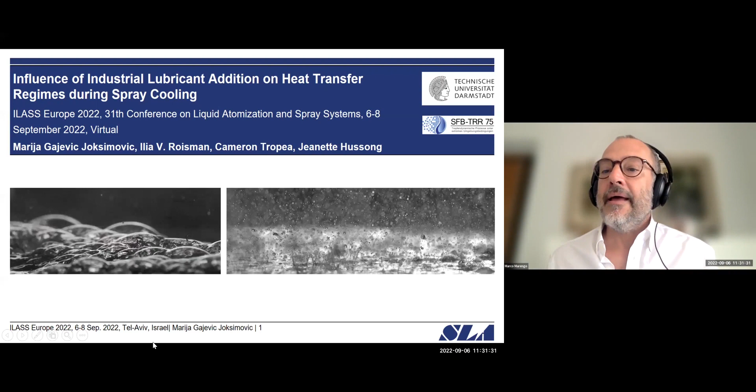And we don't see you. Yes, so, you're there, okay, fine. Now you can see? Yeah. Do you see my screen? Do you hear me well? Is everything fine? We can hear you very well and can see your presentation. So please, the floor is yours.

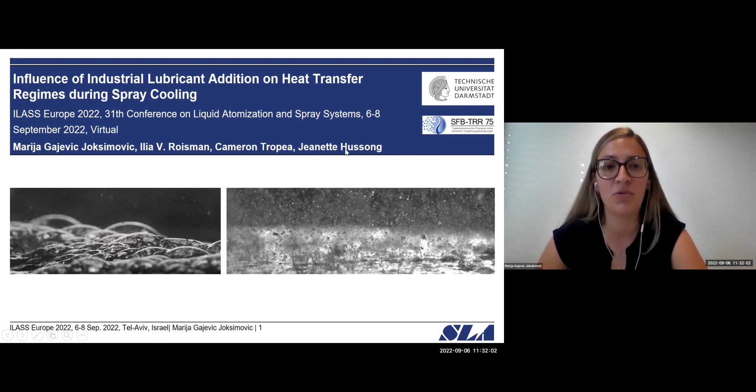First we start with motivation. What is the motivation for this type of research? Namely, in the hot forging industry, the power hammer or dies must be cooled down after each working cycle to reduce their thermomechanical fatigue and to reduce die wear.

Also, in order to achieve less friction between working parts and dies, lubrication of the contact surfaces is needed. In today's forging industry, the most widely used cooling method is, of course, spray cooling.

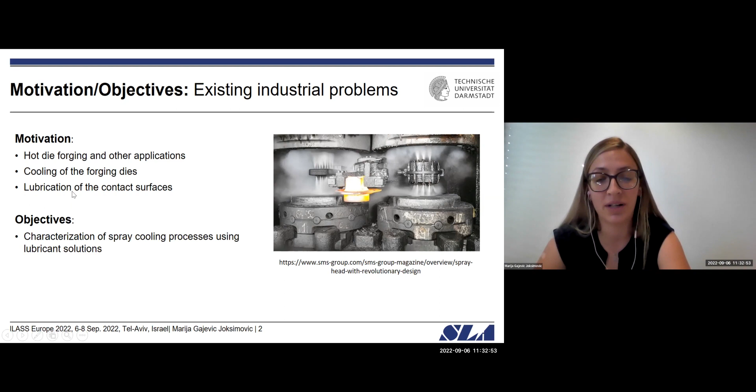This leaves us with one objective, which is characterization of spray cooling processes using complex liquids during spray cooling. Our liquids are lubricant solutions.

Lubricant Lubrodal F327, produced by the company Fuchs Lubricant, is used as a base for preparation of our lubricant solutions. It can be described as a water-based, water-miscible, graphite-free die lubricant, widely used in the forging industry.

It is supplied to us as a concentrate containing a specific amount of organic salts that provide lubrication when utilized. Also, some additional inorganic and organic components, so-called surfactants and binders, are present as well.

These additional components stabilize the concentrate and promote the spreading of adherent lubricant layers on the die surfaces.

Before spraying this lubricant, further dilution with water is needed, but further stirring is not needed because the main component, organic salts, is completely dissolved in water.

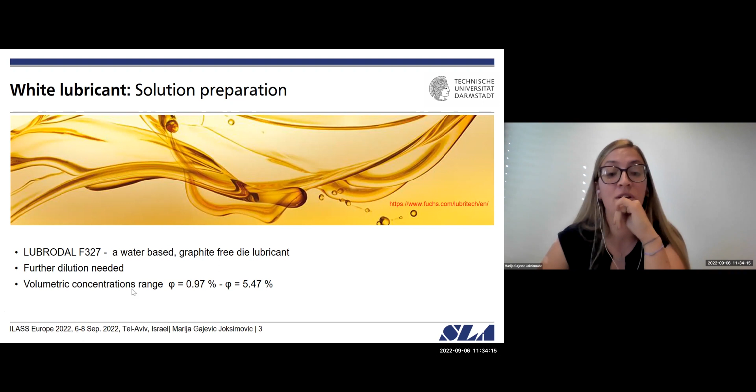In our experimental campaign, we used 8 different lubricant-to-water mixture ratios, thus achieving 8 different organic salt volumetric concentration ranges, which are presented here on the slide.

The system contains four subsystems comprising a spray generation system connected to a fluid supply, and, of course, a heating system with temperature measurement and control.

We have an observation system with a high-speed camera and backlight illumination, and a computer control unit for acquiring experimental data and controlling the experimental flow.

Spray is produced by one commercial, one-component, liquid-driven nozzle, and different impact velocities of the spray droplets can be achieved by varying the height between the hot substrate and nozzle with a linear traverse.

Also, by supplying different pressure to the nozzle, we can achieve sprays of different impact properties.

It is important to mention that after each experiment is completed, we have a solid residue present on the substrate due to the complexity of our liquids. In order to proceed with the next experiment, the substrate surface needs to be cleaned.

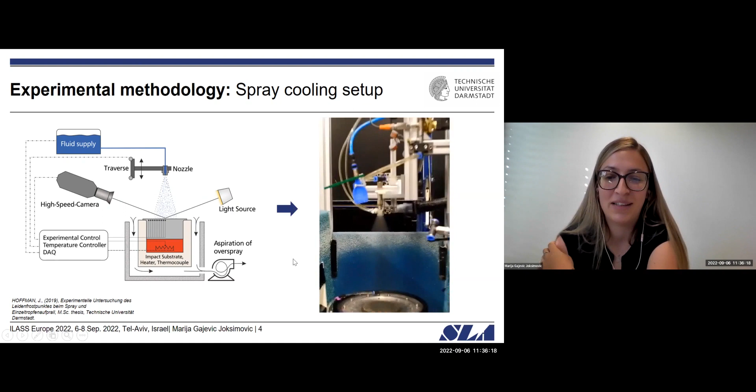On the right, you can see our experimental setup in use. This is just for show — the surface was not heated and the camera is not there, but just for you to see how it looks.

We are, of course, interested in heat flux and surface temperature of our substrate. To evaluate both, we have to solve an inverse heat conduction problem using temperature readings from thermocouples embedded in the substrate as input data.

Our thermocouples are type K, class 1, with an exposed measuring tip, thus enabling quick response time.

These thermocouples are embedded into a stainless steel substrate and arranged in two rows. The first row is 0.5 millimeters below the substrate, enabling quick response time, and the second row is 20 millimeters below the substrate surface.

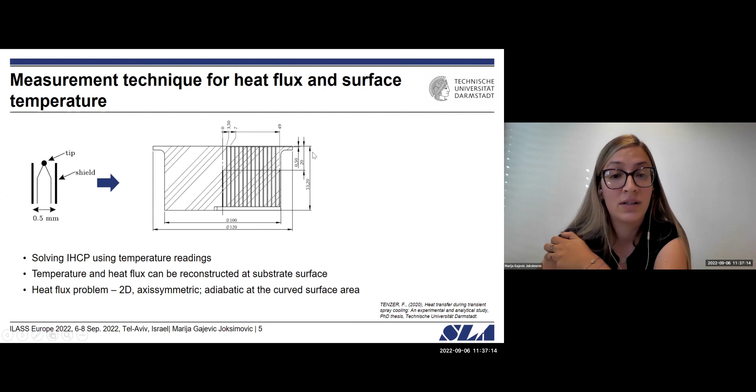Next, our substrate is placed into a watertight housing with a copper heater screwed onto the bottom of the substrate. Additionally, the substrate is insulated completely from the sides and the bottom.

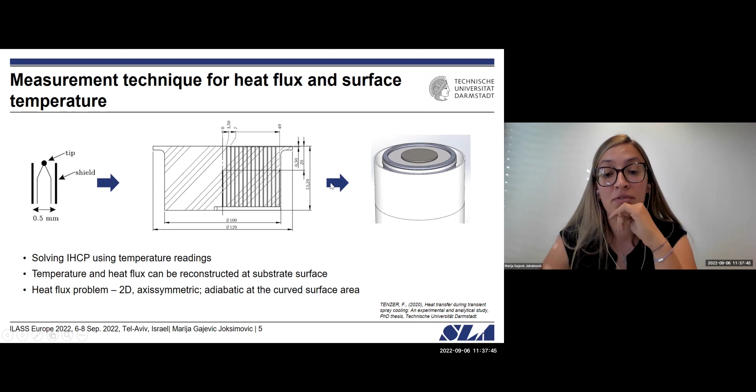This allows us to treat our heat flux problem as two-dimensional, axisymmetric, with an adiabatic condition at the curved surface area. So heat transfer happens only through the top surface.

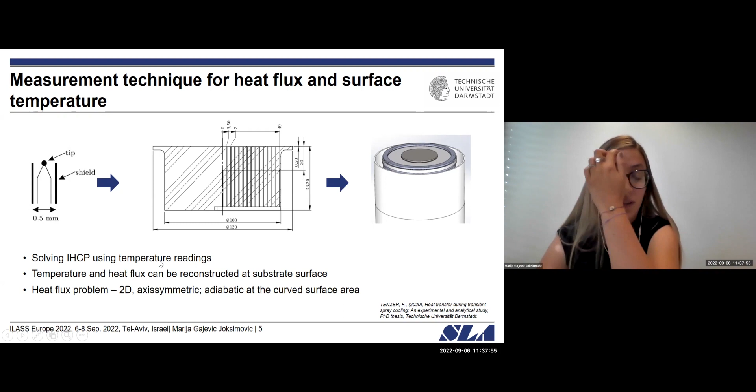The inverse heat conduction problem is solved by a procedure published by Monde and co-workers.

Before I proceed with some results from the lubricant solution experiments, I want to show you how the temporal evolution of a local heat flux looks like for a known case, which is, of course, distilled water.

For this case, at the very beginning of the cooling process we have, of course, film boiling regime, where the substrate is covered by a thin vapor layer and heat flux remains low and nearly constant for about 80 seconds.

When the Leidenfrost point is reached, we can observe the first liquid patches, identifying the transitional boiling regime. With increase of heat flux, critical heat flux is reached, and after that we see an evidently completely wetted substrate and nucleate boiling.

In contrast to that, even a small amount of lubricant added to the spray liquid significantly changes the values of heat flux, especially at the early stages of spray impact.

The values of heat flux are the same for distilled water and for lubricant solutions only during the first few seconds of spray impact. After that, the Leidenfrost point can be recognized as a kink in the corresponding curves, indicating a sharp increase of heat flux, which consequently reaches a critical heat flux, identified here as way higher than that for pure water.

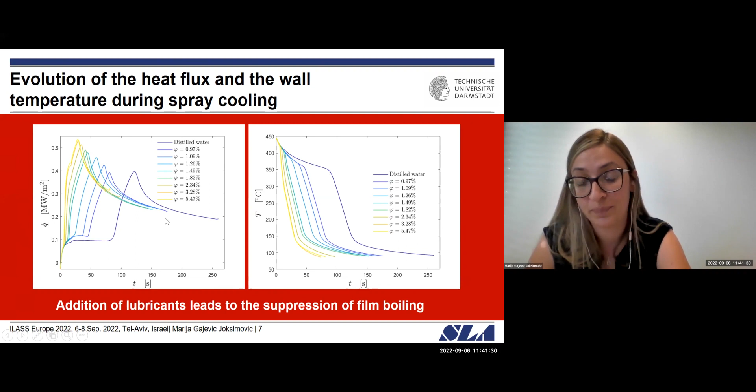Now we want to see some visualizations. We are interested to see how the phenomena of spray impact onto a hot substrate looks with addition of lubricants. Here we will observe two boiling curves: one for distilled water, and the other for one exemplary lubricant solution, with all parameters during the spraying process kept the same.

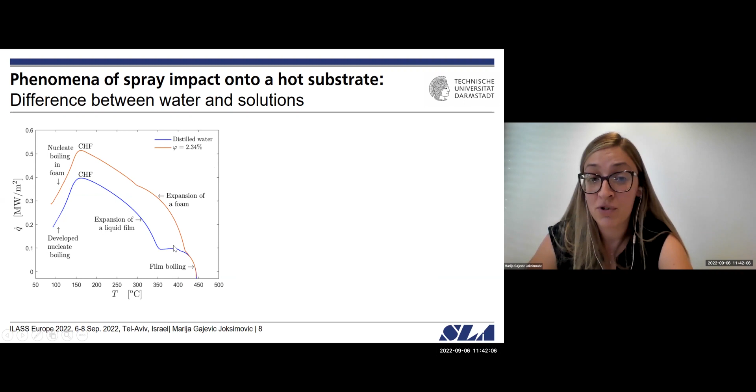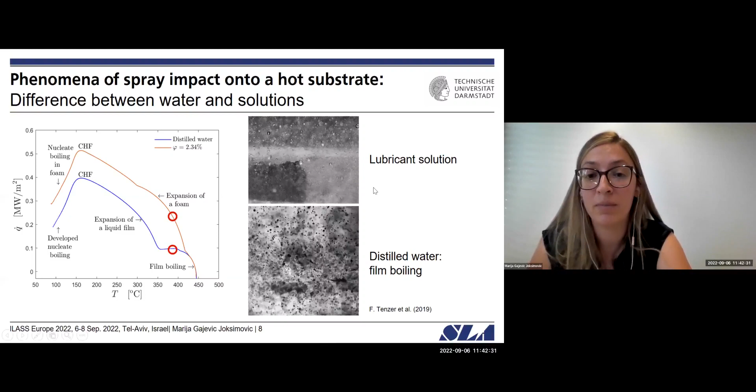At a very high temperature for pure water, we observe film boiling regime, where the substrate is covered by a vapor layer, and the phenomena of drop rebound can be observed. In contrast, for our lubricant solutions, we have separate wet spots that form at very high temperatures. These spots merge as liquid volumes and generate a very dense foam until a completely developed, relatively thick foam layer is present on the surface.

Maybe we will rewind it a little. Now, if we proceed with a decrease in surface temperature, for distilled water we observe transitional boiling with fast inception of liquid patches. For our lubricant solutions, we have expansion of a foam layer, which is here associated with transitional boiling, so the substrate is completely covered by a foam layer.

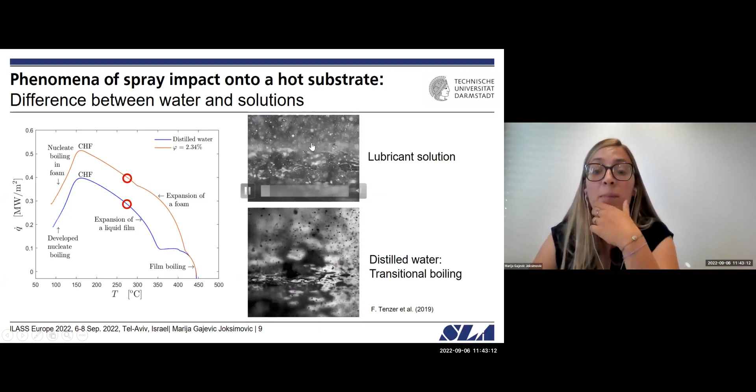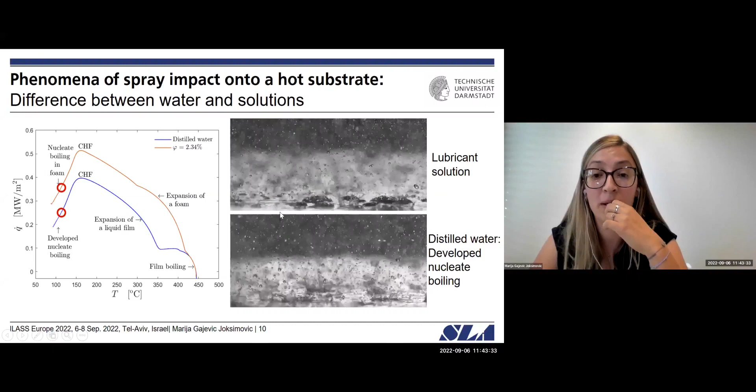If we proceed further, for distilled water we have, after reaching critical heat flux, developed nucleate boiling. For lubricant solution, we still observe foam, but breakage of the foam layer happens due to very low temperature and the incoming spray liquid. The strong difference between these two boiling curves is caused by the very intensive foaming phenomena observed for lubricant solutions.

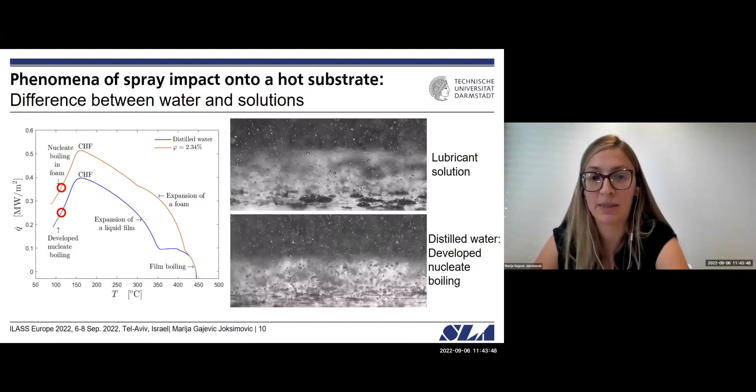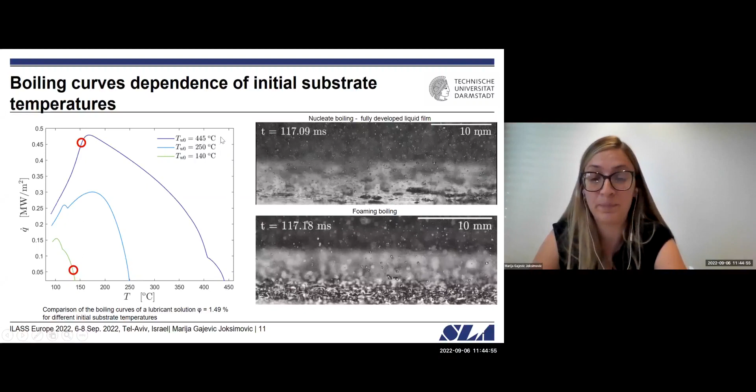We mentioned before this suppression of film boiling at high wall temperatures for our lubricant solutions, but of course we have to explain why it is happening. We know for pure water, in film boiling regime, we have drop rebound. And for our lubricant solutions, we observed this very extensive foaming phenomena.

It's thus rather tempting to say film boiling is suppressed by this foaming phenomena, but this is not necessarily correct. Namely, foaming phenomena as well as suppression of film boiling is caused by one very same reason, identified as the presence of salts and surfactants in our solutions.

During solution spray impact, we have intensive evaporation in close vicinity of the wall, and a volatile component, in our case water, evaporates first, leading to a fast local increase of salts and surfactants on our substrate, and even to salt crystallization.

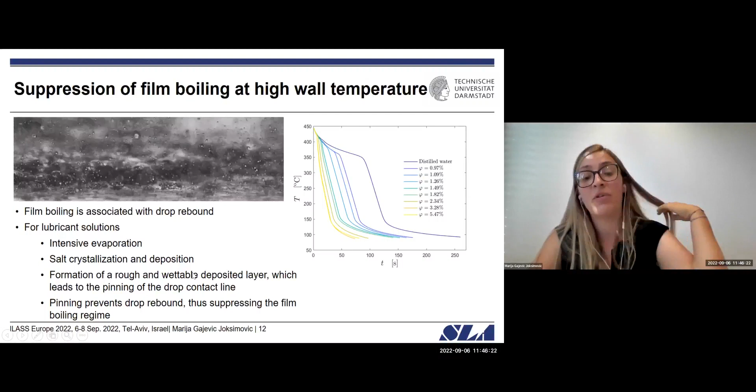This leads to formation of a rough and wettable deposited layer, which leads to the pinning of the impacting droplets. As you can see here, the impacting droplets are pinned to this layer, and then foaming starts. This pinning prevents drop rebound, thus suppressing the film boiling regime.

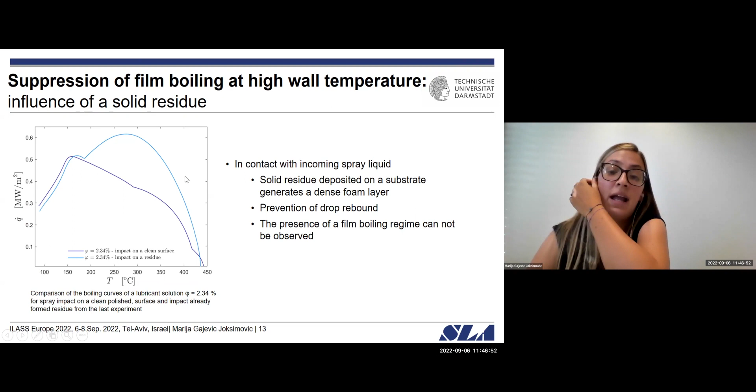As you can see, when we have this layer, no film boiling regime can be observed, and this solid residue generates a really dense foam layer, which is also indicated here by this jump in slope, with a fast increase of heat flux and better cooling rate. Around 190 degrees, we have a breakage of the foaming layer, and we apparently have an almost completely wetted substrate and nucleate boiling.

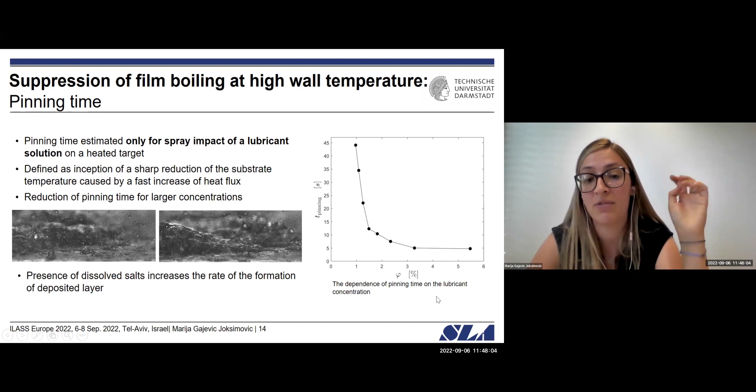So we mentioned this pinning, and we mentioned suppression of film boiling. We can estimate this pinning time from the data I showed before, which is also shown here. This pinning time is defined as the inception of a sharp reduction of the substrate temperature caused by a fast increase of heat flux. We can see here that for larger concentrations, we have a reduction of pinning time, because the presence of dissolved salts increases the rate of formation of the deposited layer.

We come to a summary. During this measuring campaign, we performed measurements and calculations of heat flux for a broad range of lubricant solutions, and we performed over 200 experiments.

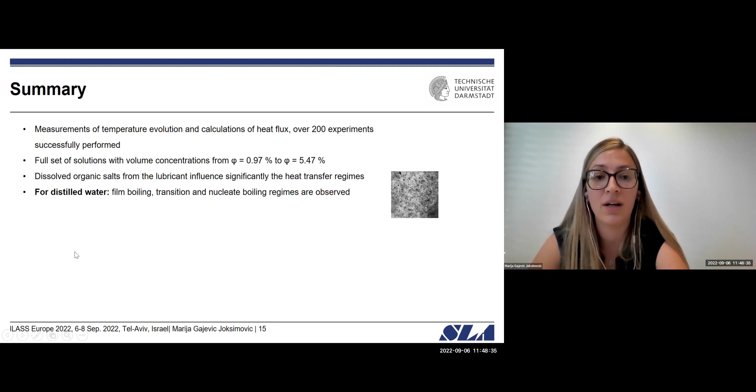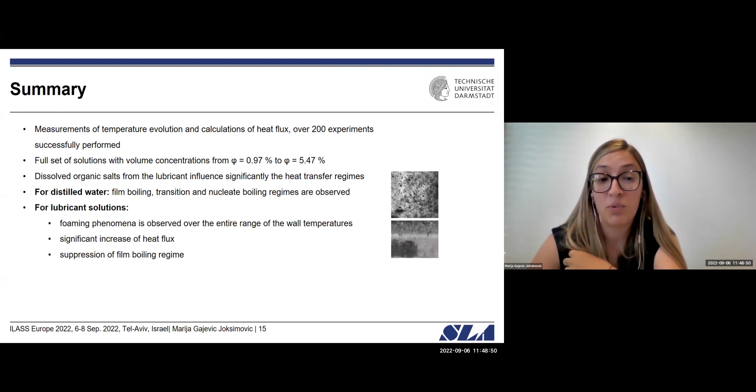We saw that dissolved organic salts significantly influence the known heat transfer regimes. For distilled water, we already know what happens, but for lubricant solutions, we observe this foaming phenomena over the entire range of wall temperatures, a significant increase of heat flux, a reduction of total cooling time, and most importantly, suppression of the film boiling regime. We explain the suppression of the film boiling regime by the pinning of the droplets to this deposited layer.

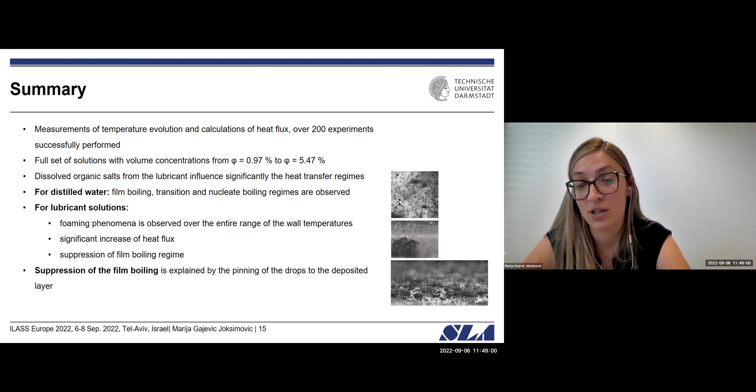Thank you for your attention, and I would be happy to answer some questions if there are any.

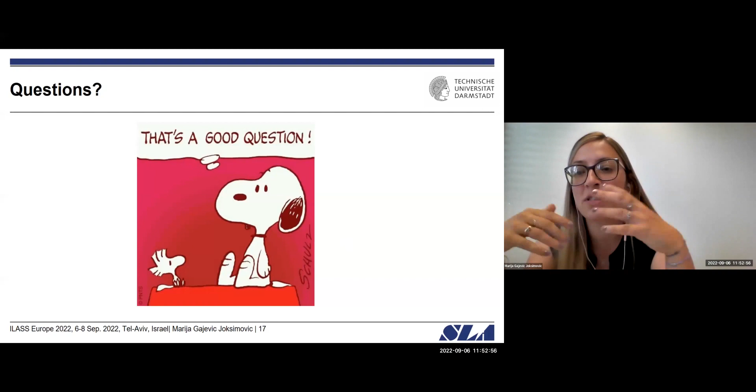So the idea is that the lubricant is part of the process in this industrial process. They like to have the lubricant, right? Because in fact my question was: the lubricant stays at the end, it's not going to evaporate, so it stays. It provides good wetting and reduces friction. It should stay and also have good wetting on the tools. So in this case you need it, but in other cases you don't want to have other contaminants at the surface.

That's a really interesting question. It's hard to differ, because when you say complex liquid, that's why we are now observing on the single drop level. I just started that measuring campaign. With the bottom view setup we can see really the initial contact and what happens, because it's hard to differentiate the influence of these salts from the influence of surfactants. It's known, and Professor Chandra has more papers on that, that the addition of surfactants leads to this foaming. So it's really hard to differ which quantity is causing which effect to be more pronounced, and for that reason I'm now doing these bottom view experiments to better understand it.

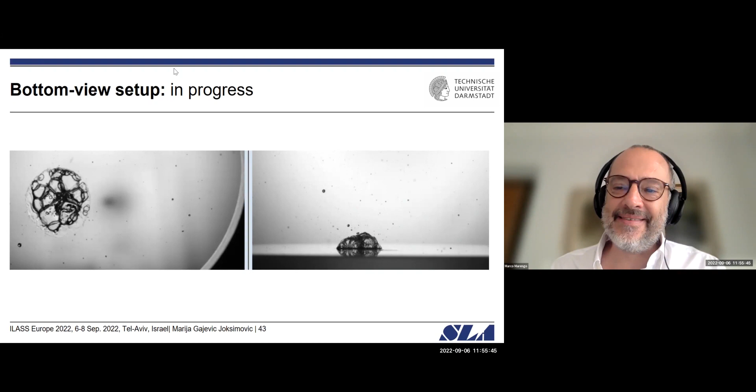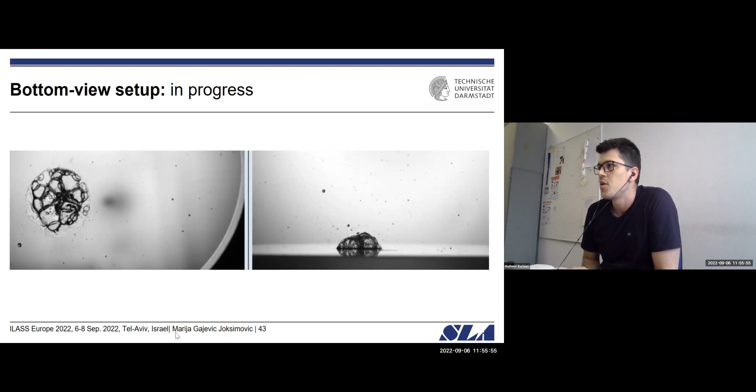But does the existence of these solid residuals on the surface increase the pinning effect when the droplets are impinging on it, suppressing the film boiling regime and inducing higher heat transfer coefficients?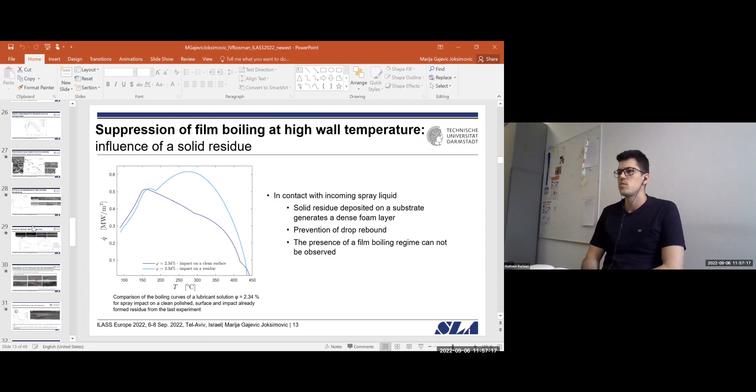Yes, so basically we have this layer present, and then when a spray impacts, almost at the same moment we have really good wetting, so we do not have drop rebound. We know that at this point heat flux is really low, but here we have this really intensive foaming which cools down the substrate, and because of that we have a fast increase of heat flux and cooling rate. I can show you how this looks, I have it somewhere.

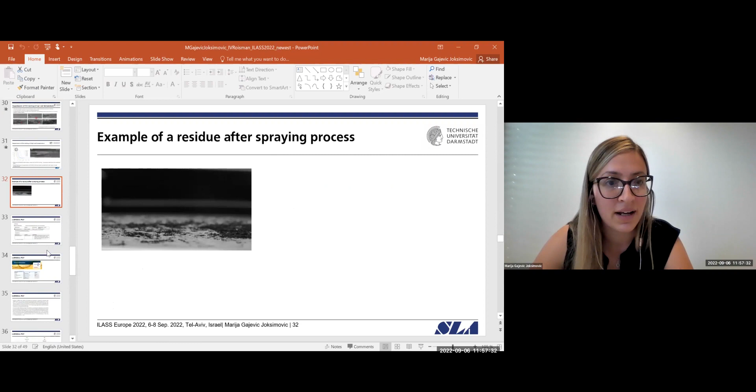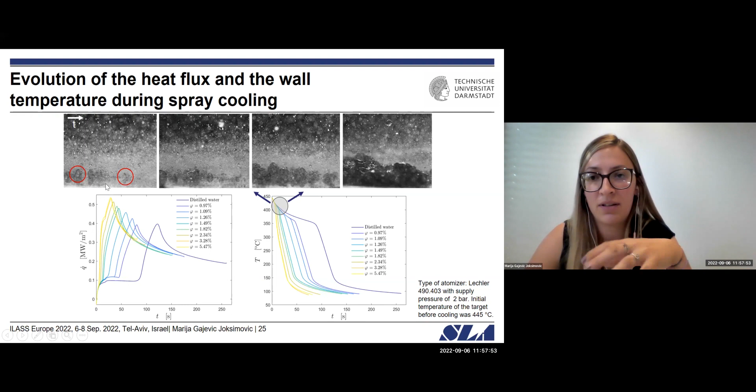So this is how a residue looks after the spraying process, left on the substrate. You can see here how we have these separate wet spots that emerge. Imagine now that when we have a solid residue, the whole substrate is covered almost immediately by this foam, and because of that no film boiling at all can be observed. If you look at the third picture in a row, this is how it looks almost immediately after spray impact. Because of that we of course have a really fast increase of heat flux.

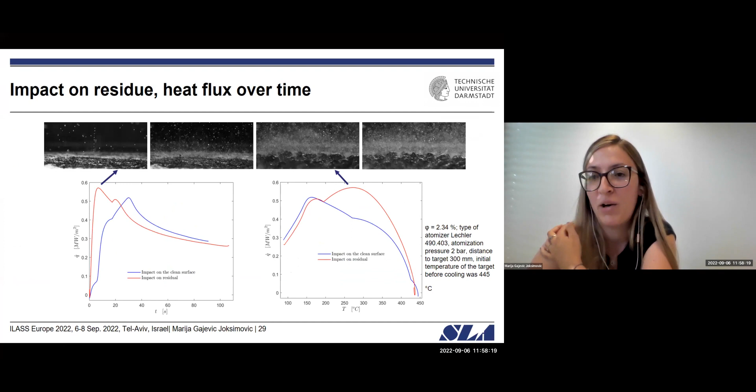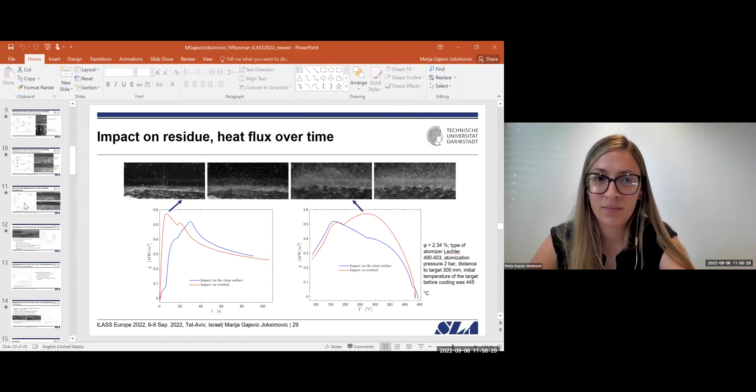Because we are also investigating something similar, not with sprays but with immersion of a hot probe in a liquid solution, and maybe it's also related. We are also going to measure the surface energy of the solid, which can have an effect on the wettability and also on the impingement and the pinning effect of the droplets on the surface.

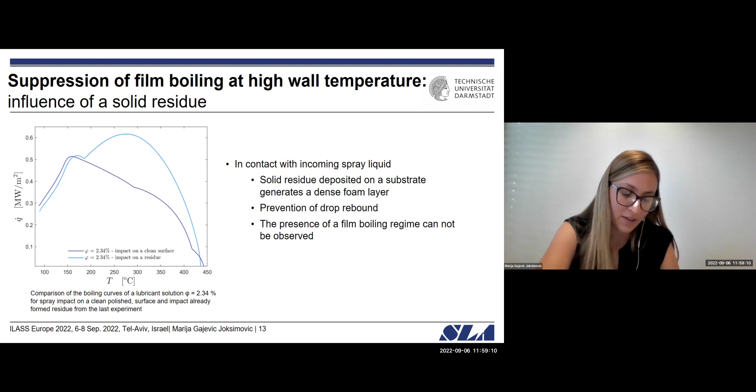Yeah, so of course, that's really interesting. Maybe we can exchange some ideas. I will just write your name down. Mateus, which is your affiliation? Sorry, which is your affiliation, Mateus? I work at the University of Bremen.